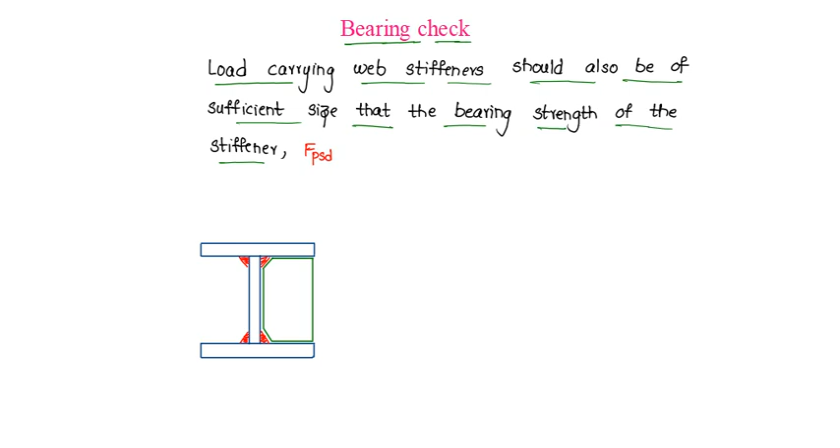Bearing check. Load carrying web stiffeners should also be of sufficient size that the bearing strength of the stiffener, FPSD, given as AQ into FYQ by 0.8 times gamma m naught, should be greater than or equal to Fx, where Fx is the external load or reaction, and AQ is the area of the stiffener

in contact with the flange. That is, when weld is provided, the stiffener, this is our stiffener, is coped at the weld location, this is coping, in order to account for the space, and the width of the stiffener here gets reduced to some B. Let us say the thickness of the stiffener is TQ, then AQ will be equal to B into TQ, whereas FYQ is the yield strength of the stiffener.

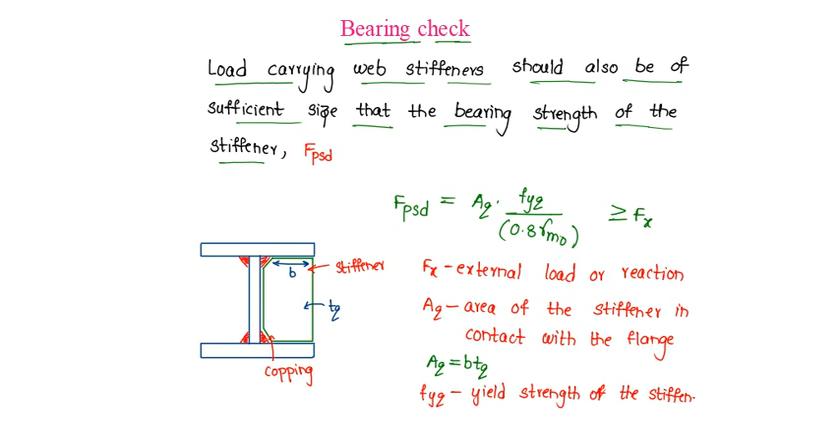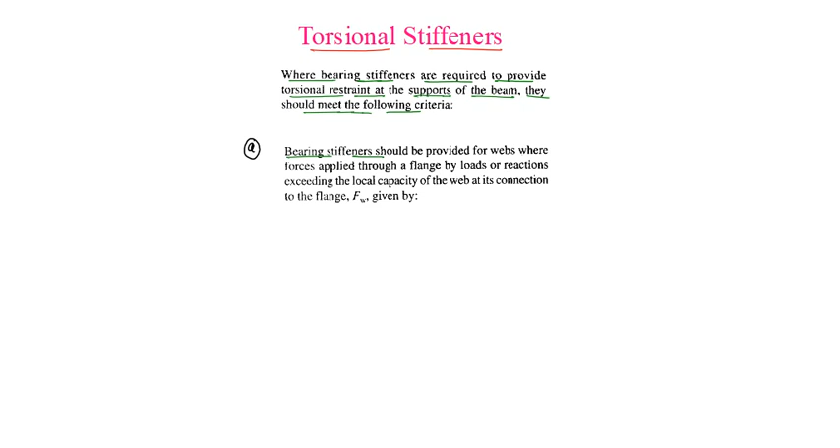Torsional stiffeners: where bearing stiffeners are required to provide torsional restraint at the supports of the beam, they should meet the following criteria. The first criterion is bearing stiffeners should be provided for the webs where force applied through a flange by loads or reaction exceeds the local capacity of the web at its connection to the flange, Fw, given as B1 plus N2 times the thickness of the web into FYW by gamma m naught, where B1 is the stiff bearing length

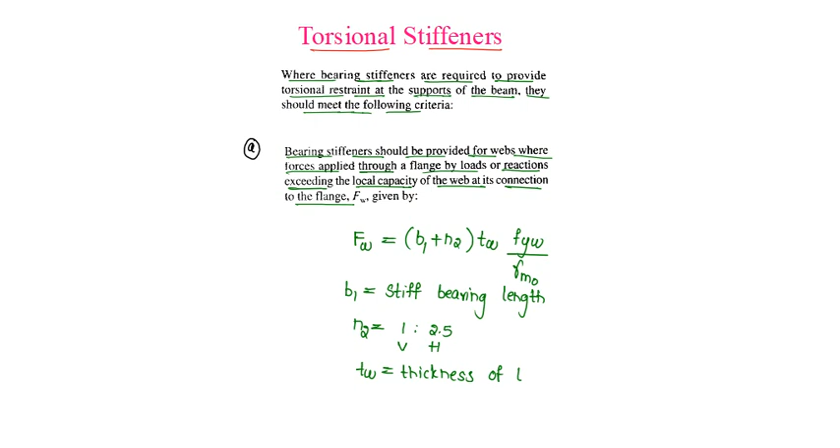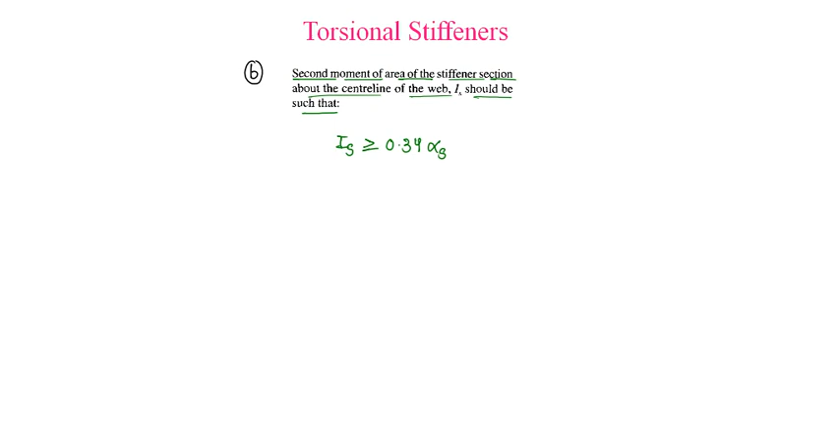and N2 is the length obtained by dispersion through the flanges to the web at a slope of 1 is to 2.5, 1 vertical to 2.5 horizontal, TW is the thickness of the web, and FYW is the yield stress of the web. The second condition is the second moment of area of the stiffener section about the center line of the web, IS, should be greater than or equal to 0.34 times alpha S into D cube into TCF, where alpha S is given as

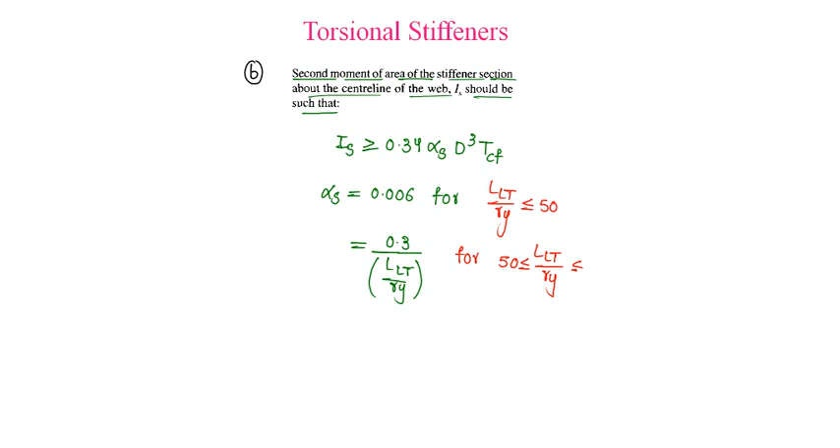0.006 for LLT by RY less than or equal to 50, whereas alpha S is equal to 0.3 by LLT by RY for LLT by RY between 50 and 100, and alpha S is given as 30 by (LLT by RY) whole square for LLT by RY greater than 100.

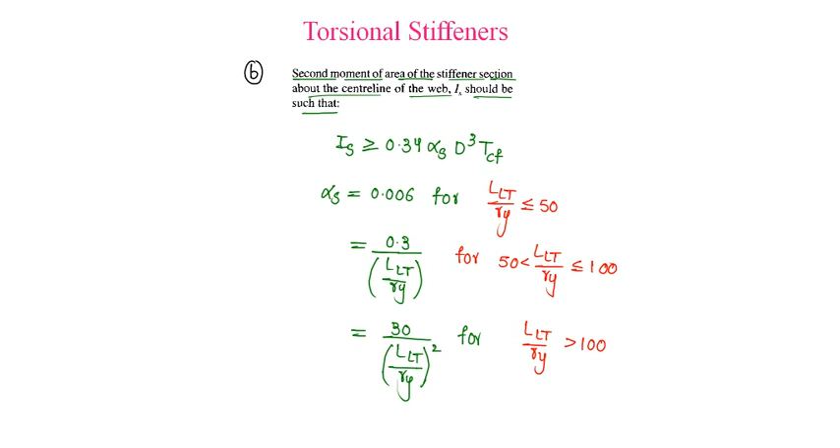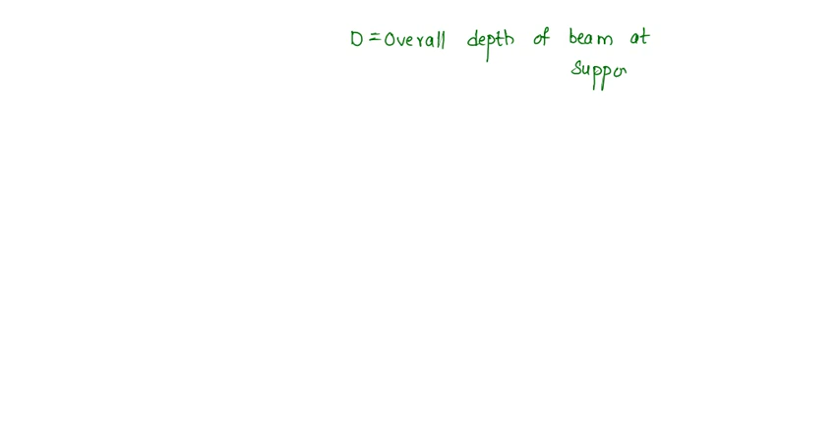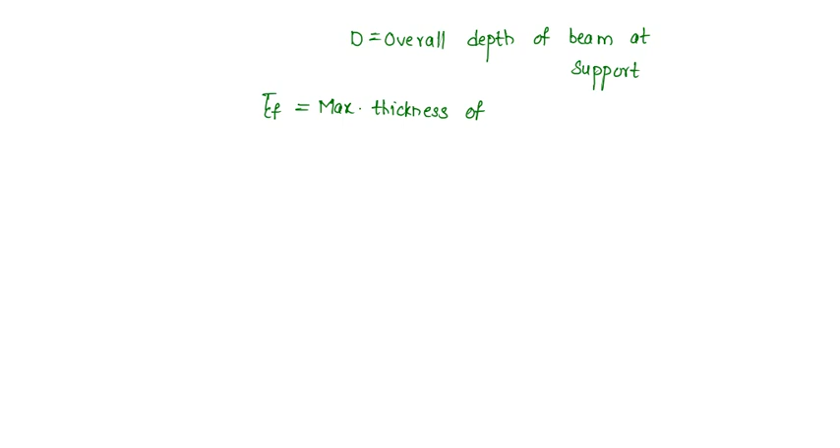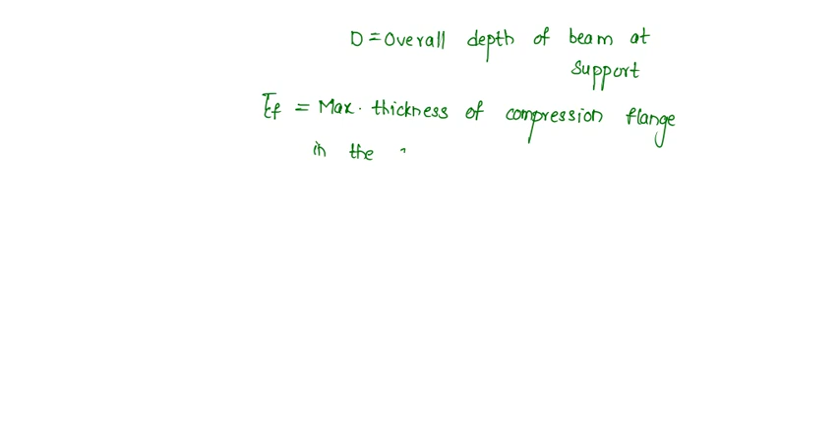And in D cube, D is the overall depth of the beam at support. TCF is the maximum thickness of the compression flange in the span under consideration, and Ry is the minimum radius of gyration about the minor axis, and LLT is the effective length of the compression flange.